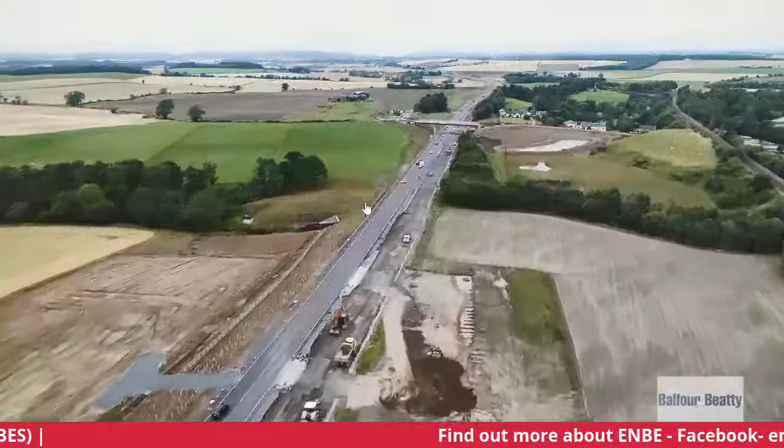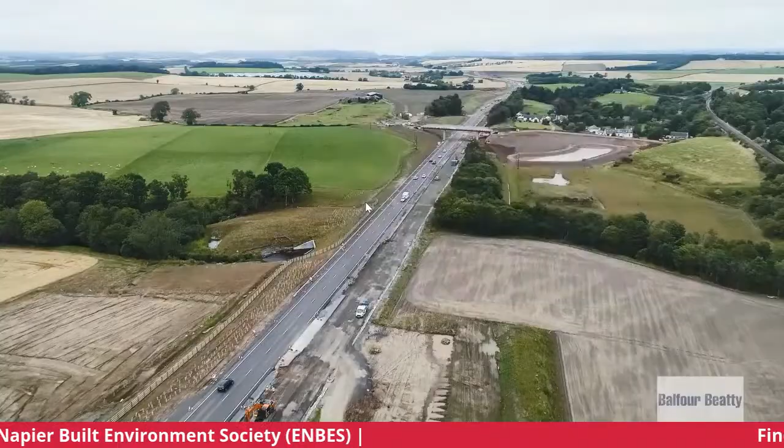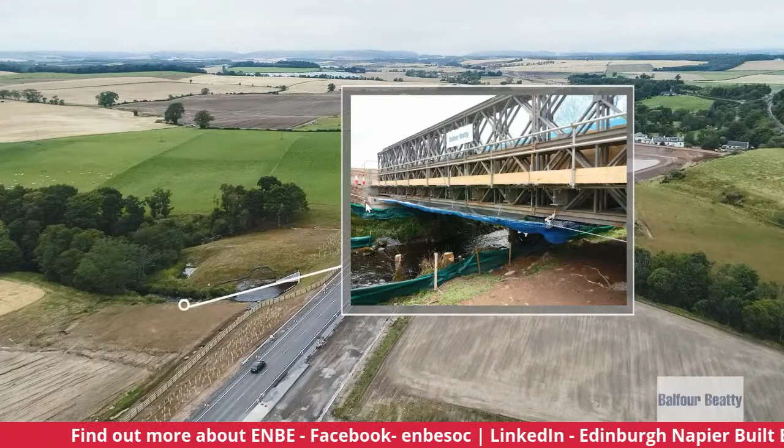So that culvert was formed with precast concrete panels and lifted in, occupying half the river at a time. This minimised the amount of live or wet concrete going into the river. To get past this river, we actually installed an army-type Bailey Bridge - we launched this in place. This then gave us access to earthworks and negated the need for transporting on the road; we could actually transport on our haul road. Now this is sped up, and if you blink you'll miss quite a lot here - this is the excavation works at the culvert, getting ready.

Then we bring in the crane. This lifts in the precast units, swap over to do the other side. And once they're in, we can then backfill over the culvert, and that then starts joining up the road there.

So we bring the material up to formation, done with the capping, remove any soft spots from the testing, come through with effectively the concrete road and then the surfacing.

Following that, you'll see coming through there the verge works, drainage topping up, topsoiling coming through there. You see the winter coming in, and then getting ready to put the traffic on it.

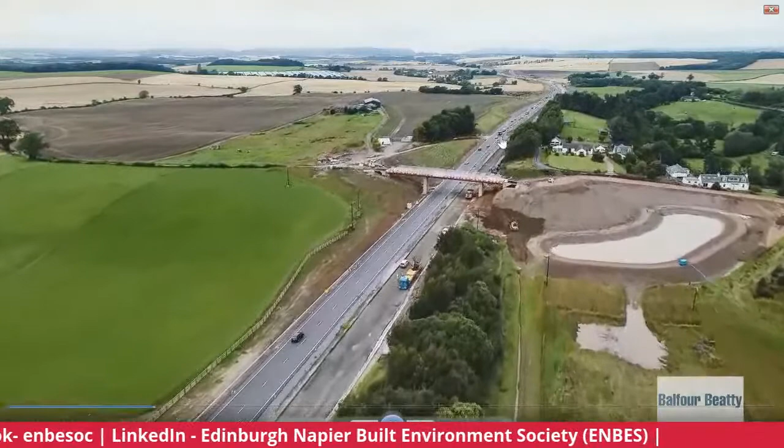But before we put the traffic on it, the adjacent bridge, which you'll see in a minute, took the beams in, and then so this bridge here is Pitlandie Bridge. It's called that. It's mainly for farm traffic and local traffic to get across, whereas previously they went down that track and nipped across. Large SUDS pond there, sustainable urban drainage system.

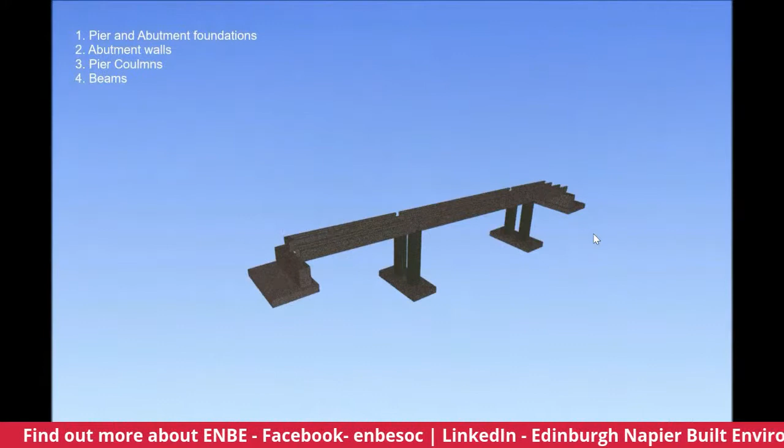So this bridge, because of many visits to the site we've had, we split this down into abutments, piers, precast beams, and then on the bridge deck, onto copes, backfill, extension wing walls, out to the parapets, and then you've got your impact barrier on the top.

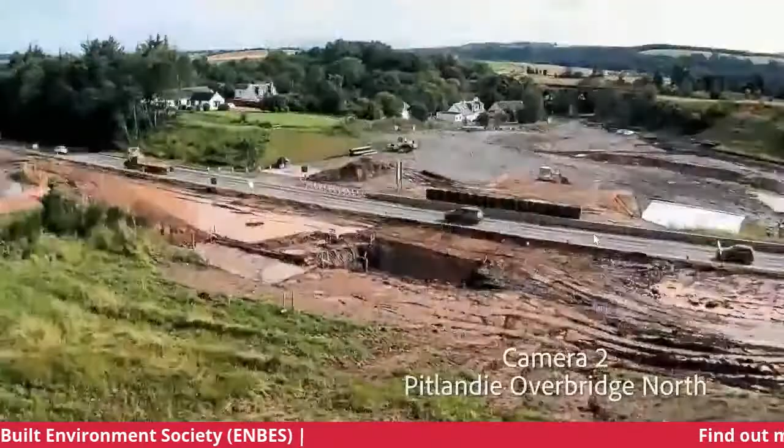So how does that actually look like in real life? You'll see the sheet piles on the other side. That's because the excavation for the pier is that close to the road. So piers on this side.

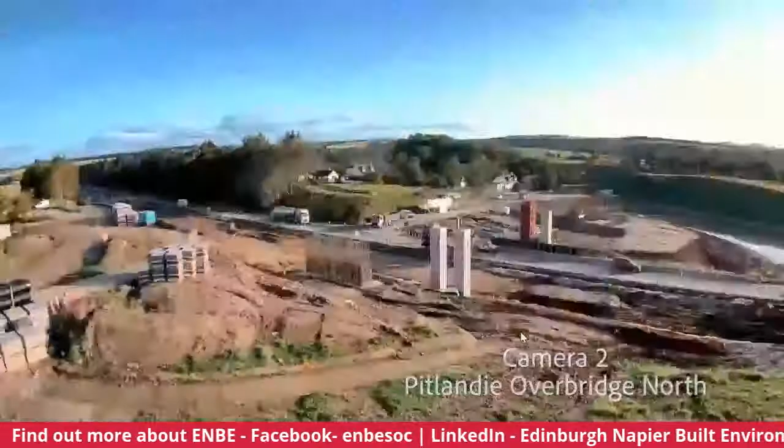Now we tried to ensure that we had as much replication as possible, so the formwork could be used again and again. So that, as you'll see, is the standard style of the piers and the abutments.

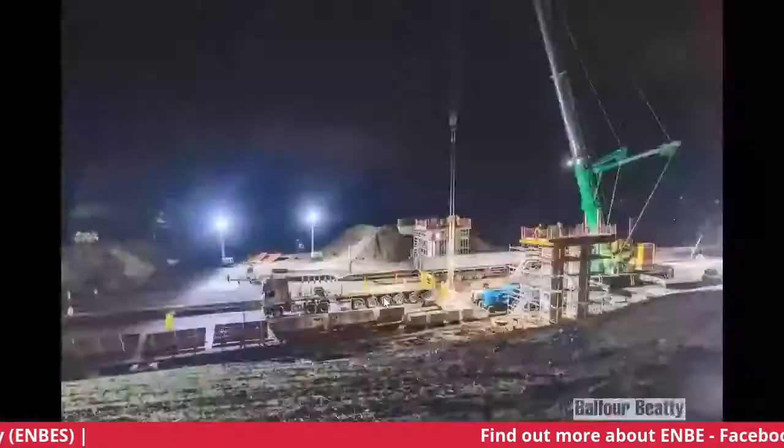And then when we're ready for taking in the beams, they land directly on top of the structure. There's no bearings as such, it's integral. There's a viewing platform across on the left-hand side there for people to come and see.

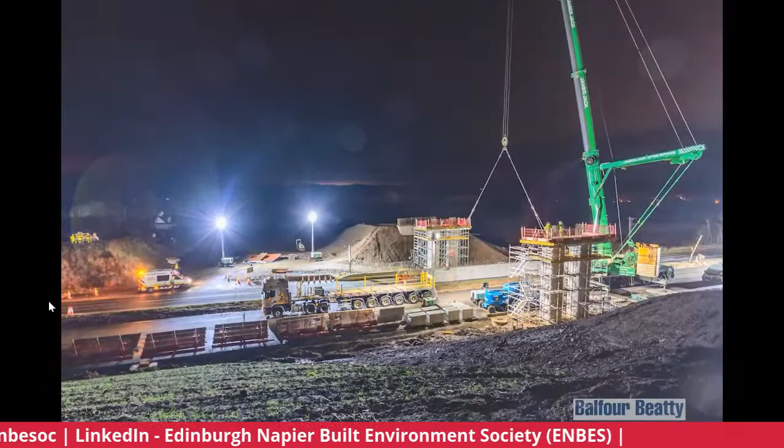Everybody's very interested when you bring in an 800-ton crane to lift these beams. You see them doing a couple of trial test loads there, getting the strops the right length so it comes down and then secured into place.

So this was a nighttime possession, closure of the A9. Diversions 30 miles either side. So a lot of advanced planning to do this. You can't just do this on an ad hoc basis, and once you're committed to that date, that's what you've got to go for.

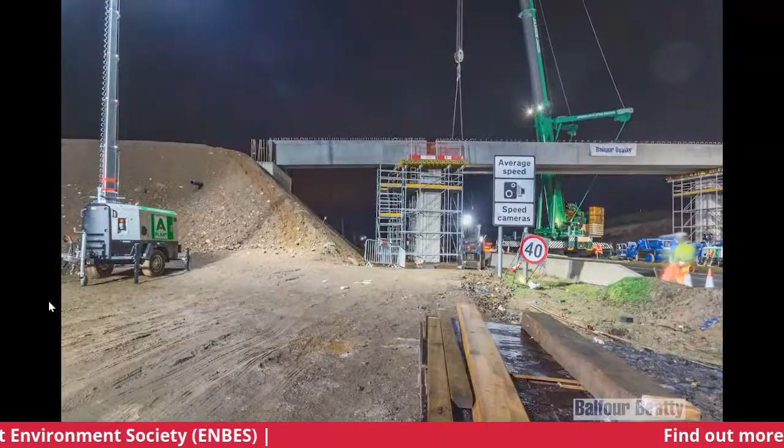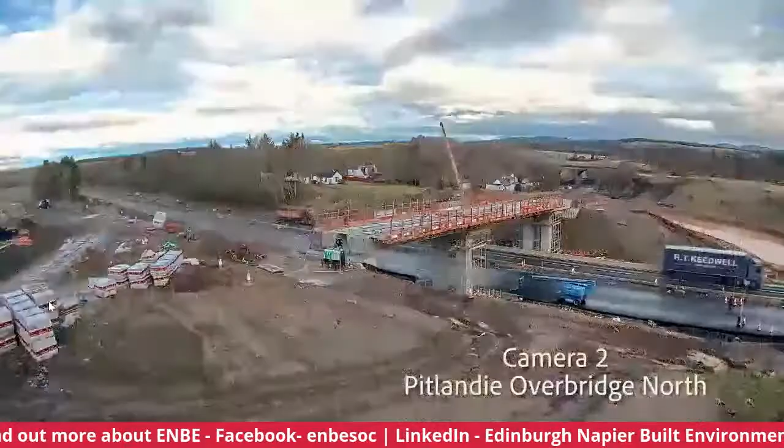So some beams are longer than the others. Once we got the precast beams on, we then lifted on the cantilever sections, trying to focus on the road possession and then drop back onto the bits that are not a road possession.

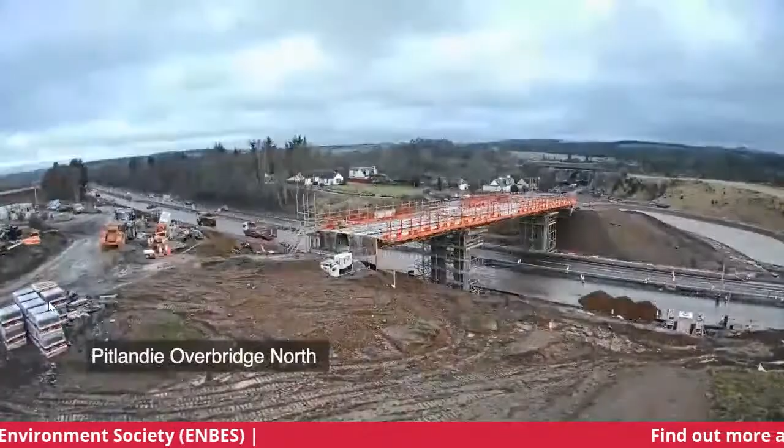So once they're in place, the plastic GRP panels, steel fix the deck, and then we can cast the deck. And then cast the diaphragms, which are at the abutments and over the piers.

As soon as it allows it, we can get the topsoil onto the verges, onto the embankments, and get the planting done. Thousands and thousands of new trees getting planted. Part of that is to negate the trees that had to come down for the corridor of the works.

See the junction there? That effectively will get done away with at the end of the day, and this road here would be the access. So it's minimising traffic coming onto the carriageway and increases the safety of the road, whether that's from tourism, tractors, or anybody else coming on.

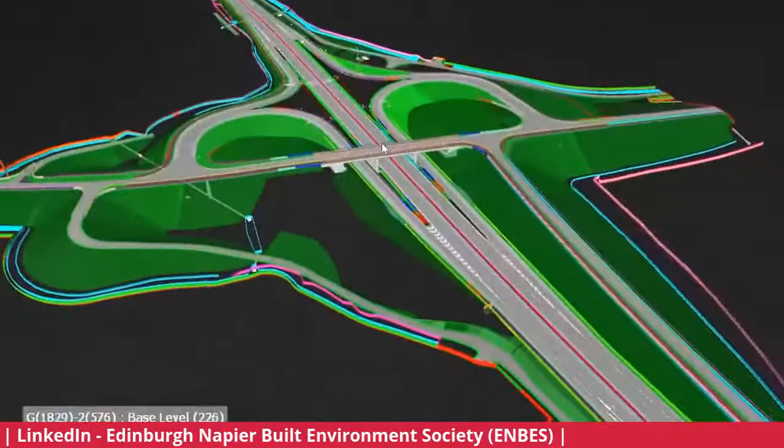Now in this area here, like I said, 500,000 cubic material was imported, and part of the works with Atkins was using 3D design and modelling. I'm not sure how many of you are working with a consultant are going to be familiar with this. Yeah, the colours are a bit wild, but they help highlight and detail different elements.

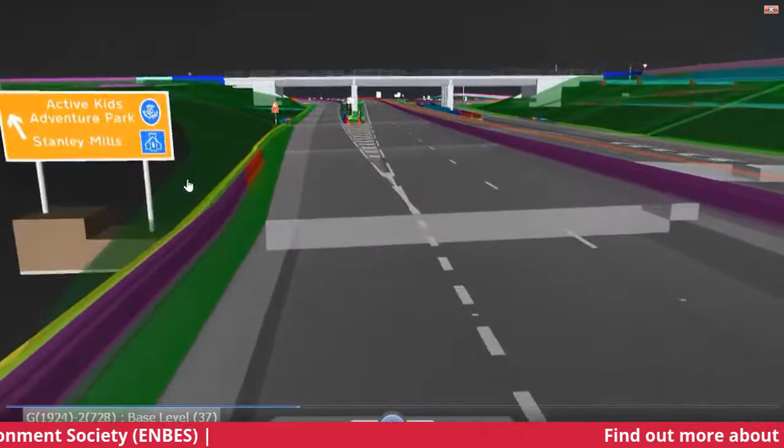Now this can be used with initial 3D modelling, then taken onto the 3D design. The whole point of this is though that we can highlight potential clashes, whether it's a base of a sign hitting a drainage, whether it's ducting going up, whether it's an existing culvert or lade which you require deep drainage.

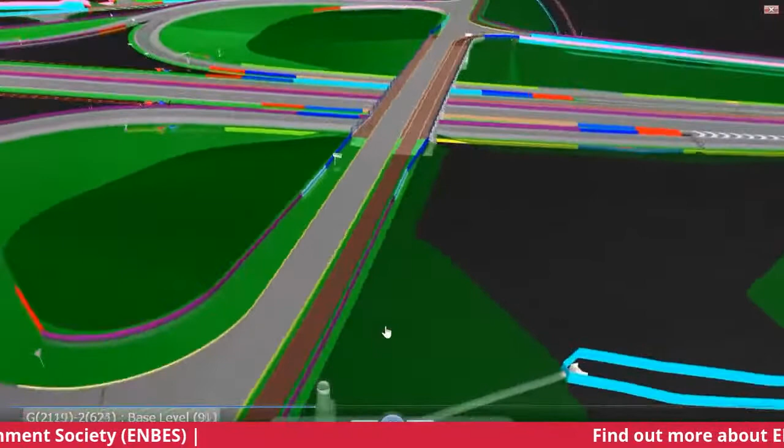So you'll see in the background here, this line here - that's a culvert we'd install before the earthworks. And then show where the cycle paths are going, visibility splays.

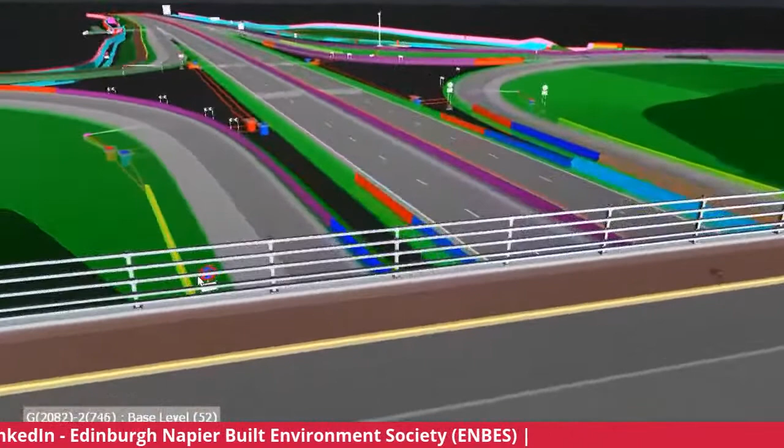So depending, this is obviously a fly through, but you can position yourself in any point of this model and see how things are coming together. Very powerful tool.

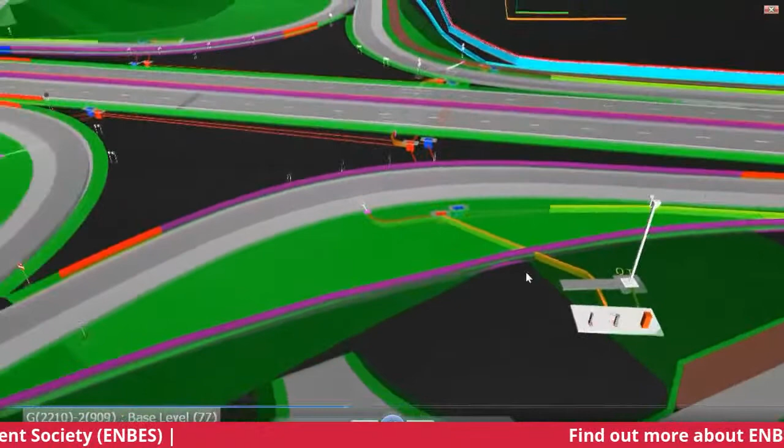It can help getting your signs in the right place. So coming up to a junction, for example, do signs block the view? I mean, that's not going to change your final stage audits from your road traffic, but you can see there the traffic counters inducting there, another one here. Many people don't know about the loop detectors and axle counters that are on roads.

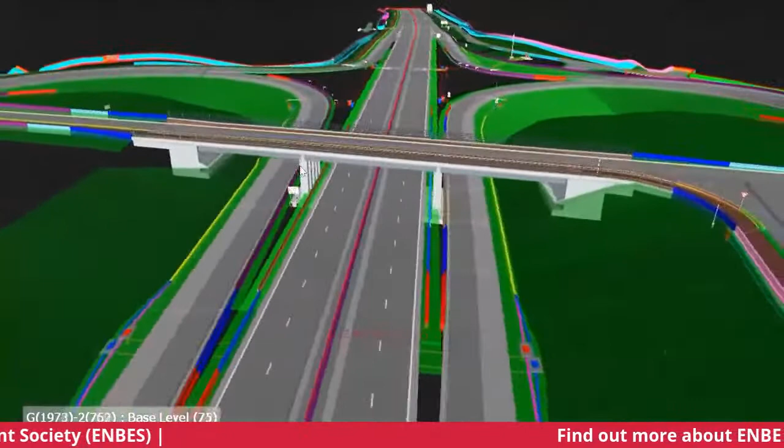Landscape area, where we can put the unsuitable material. A lot of the material we had here was marginal. We had to use a lime modification, basically rotavating lime into the soils, hydrating it and getting it to the optimum moisture content, which then allows the compaction of that material. Otherwise, that material would not be suitable to go in the embankments.

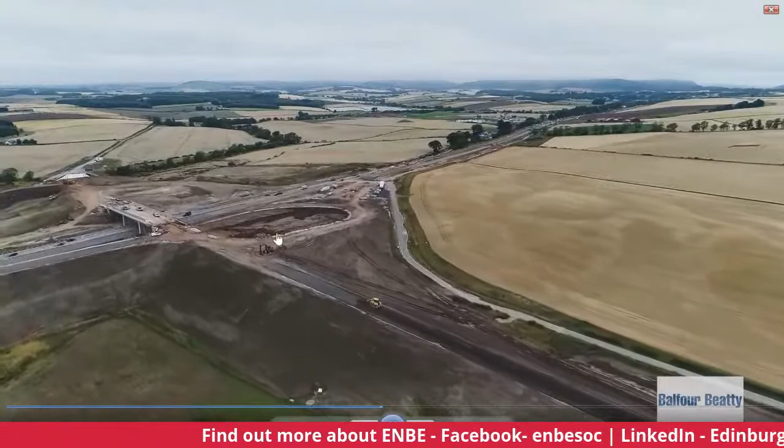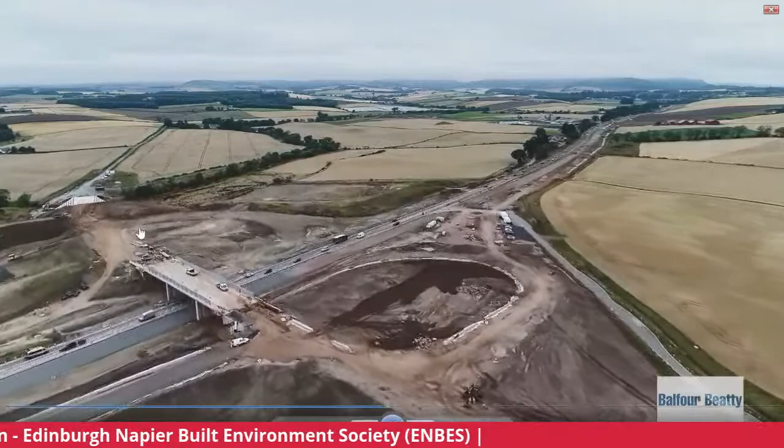So back to a live aerial shot from the drone. You can see the black there, that's actually planings, road planings that we're actually using as a lower sub-base type material. So that's minimizing materials going off site. You can see the suitable material there, and the white of the French drains, filter drain at the edge of the carriageway going round. Once we had this bridge in, this helped a great deal with getting access back and forward. This was a borrow pit to get some sand and gravels, and then there was this bridge here that we had an option to design.

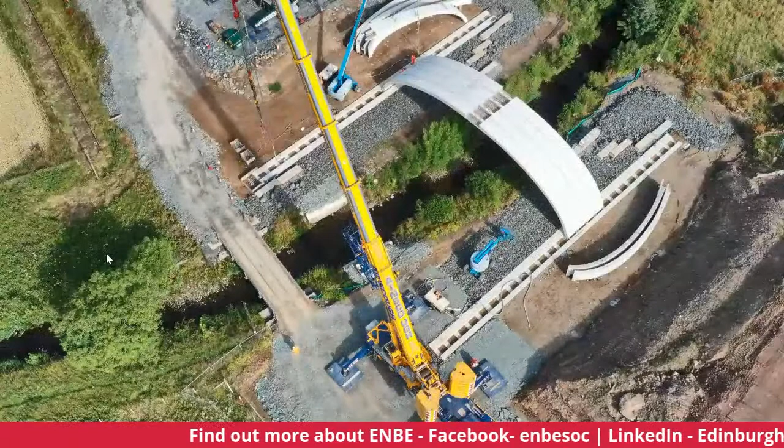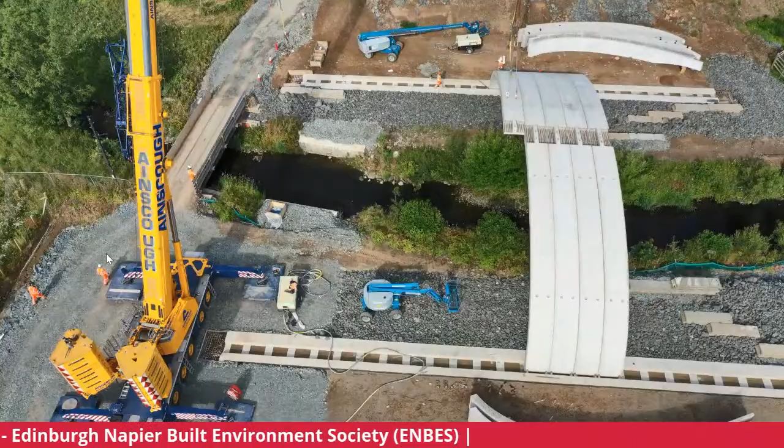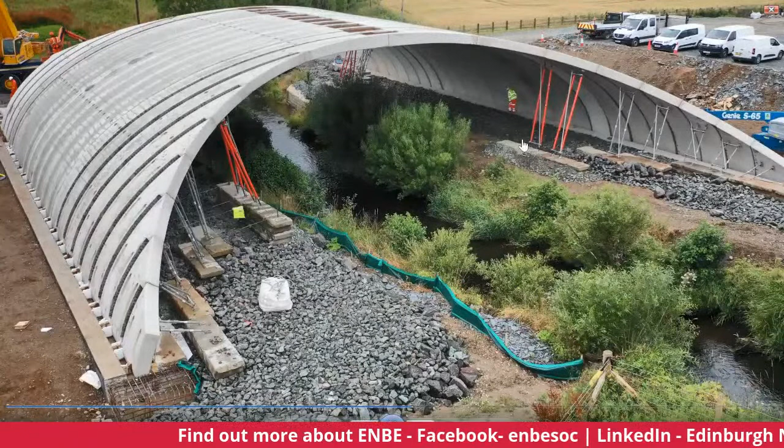So this went for a Bebo Arch. Apparently it's the widest span one in the UK, because this is a floodplain area. The sections came in on their side on lorries, and the crane either side lifted the arch, rotated that into a vertical position, and then they went together in pairs. Where they then didn't meet at the top of the crown, temporary works is required with blocks and props to hold it in place, and then the strips at the back were filled with reinforcement, joining up the existing bars, and then concreted in place so the whole arch was one.

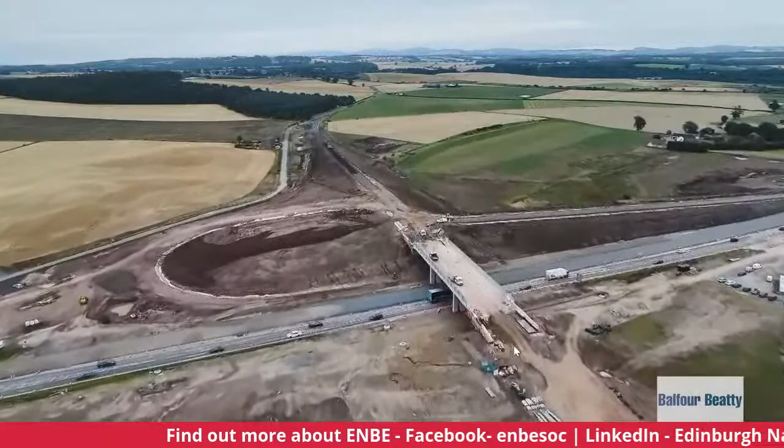We then swing round and start heading north again. Now, the reason I'm using this footage rather than the up-to-date one is you actually see more in it, rather than a finished road, which is in this location at the present moment, if any of you are driving up and down. But then on the right-hand side here is where we were into agricultural fields, and you can see as the hills appear, there's quite a volume of material to come out. So there's a new road for the part of dual carriageway there, and then this access road for farms running down the side like a parallel.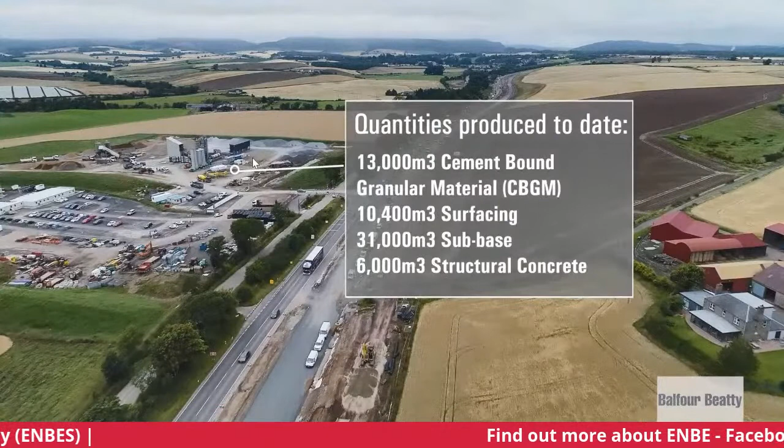Site compound here, and adjacent to it, Breedon's had a quarry. They produced the cement-bound material for the CBGM, surfacing and the concrete. So coating plant, you can see just sitting there, a concrete plant here, and a screening plant across out of the view on the left-hand side. Existing fields, so the new excavation came right up here, so cut-off drains, and you had batter drains where water would seep out. All that had to be controlled.

The existing junction going into Bankfoot is going to be remodeled, so temporary and then a permanent around the back. And this junction becomes longer, so the vehicles are travelling at a faster speed on the new carriageway, so the merges and diverges are increased. Now, this can be seen on the next part, which is a sort of animated video, which can be produced beforehand. And the whole point of this is that even local people can see what we're intending to build. So when we're finished, it should look a bit like this, with the longer junctions. And here we got the modelling, then the building in 3D, and it can be moved back and forward to help design and resolve issues.

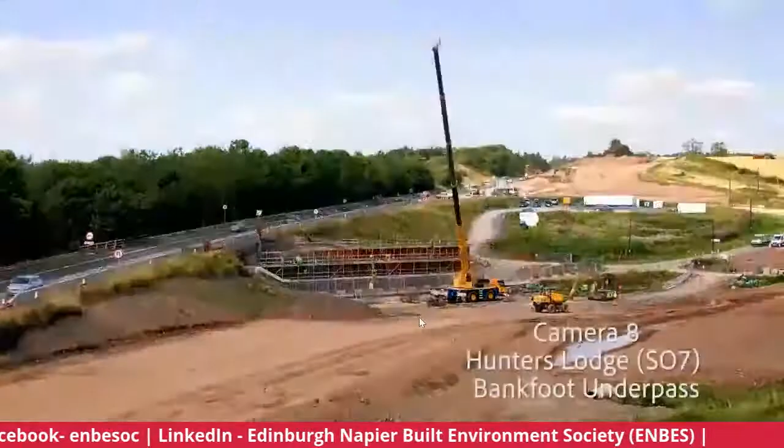Huge excavation here on the hillside, which then took us to Bankfoot. Now, the existing under bridge was just so long, but we had to extend it because on the skew it's over 50 metres with quite extensive wing walls, whilst keeping this road open. Now, some of you came up to do a hackathon to say, how are we going to build this? So for those, I think with Ben, yourself, and a few others, at this point you can see what actually ended up being the option. We actually ended up putting traffic lights on and then building both abutments simultaneously. I think one of the groups designed it alternately, and one group came up with simultaneously. So using a formwork, this formwork is called Peri.

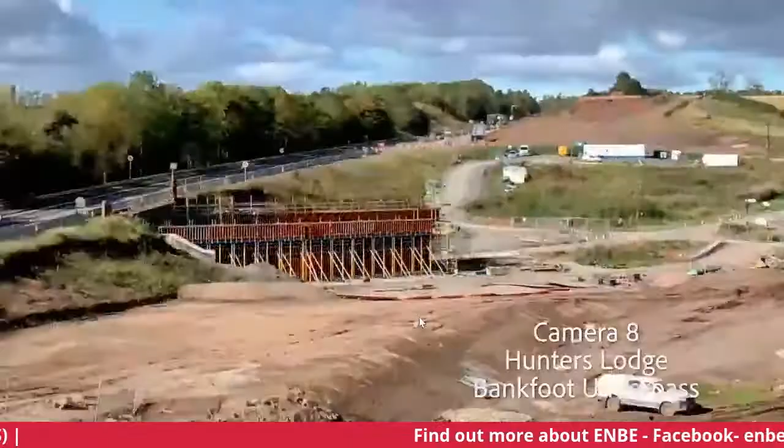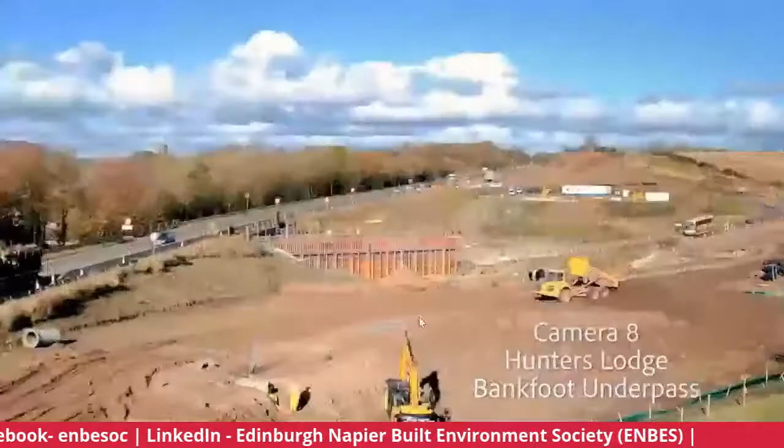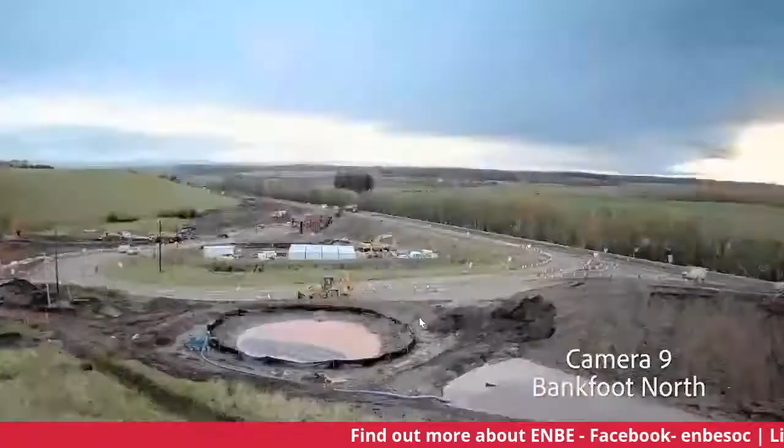The trio, modular panels, very quickly put together, standard from there. Meanwhile, the earthworks happening in the background offline. They're waiting for us to get the structures finished. But a lot of problems with water. So temporary SuDS ponds. We used added chemical flocculant from TATEC. This helped to clean the water before it was discharged.

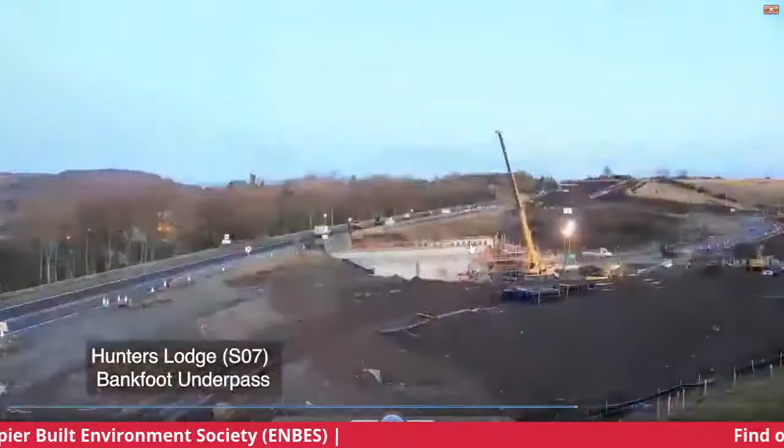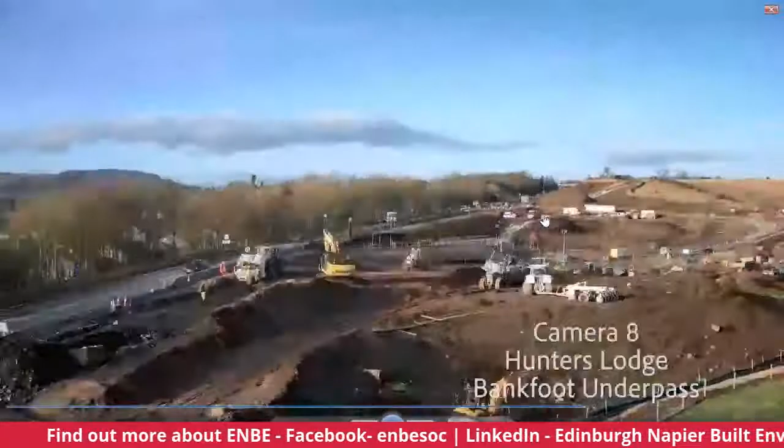So the two abutments were in place there, so get that blackjacked and backfilled before we could put the beams on the top there. In this area here, you see the white appearing in the background there. This is a lime tanker, so in between the snow, applying the lime, modifying the soils, and bringing them up to a structural embankment.

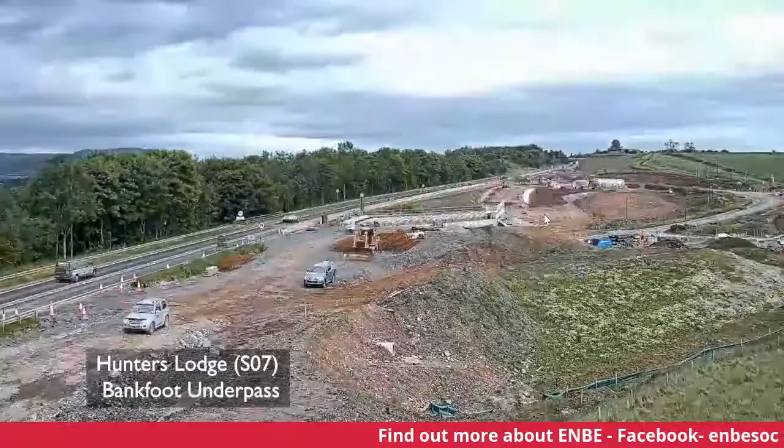And if you blink, you miss a lot of things at the speed of this. So that was COVID back in March. Fantastic weather, not permitted really to do anything. Then we got back and started. So then getting the fill in between the road here, because new road, and then the two slip roads. So the new slip road comes down and round, traffic going in or traffic coming up and going back out. So no cutting across the carriageway.

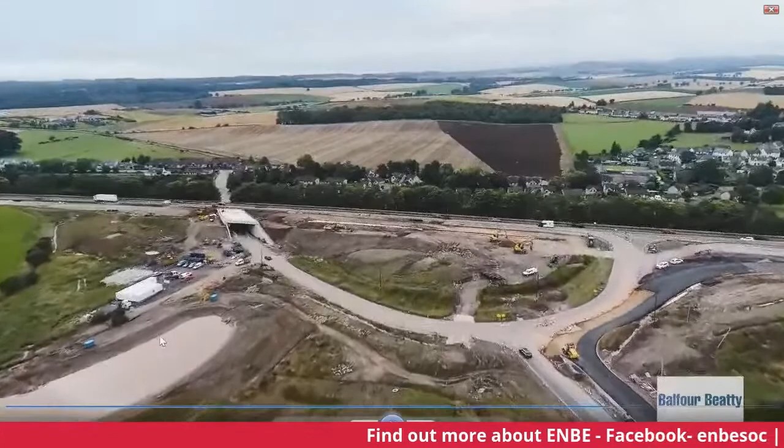Quite a large extensive SuDS pond there. Huge catchment areas when you're constructing roads, especially with the downhill. Now, you'll see the existing, I'm going to just stop this here. So the existing fields are here, the existing road there. So the slope has had to move all the way back and up to here. Now, if that was continued all the way through, the local farm there would be in thin air.

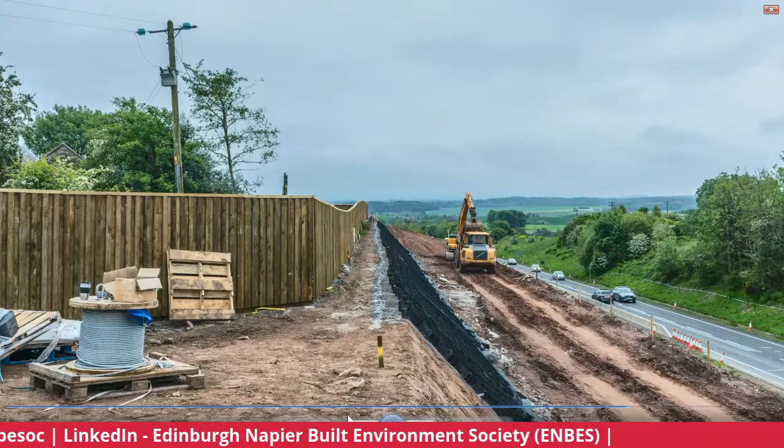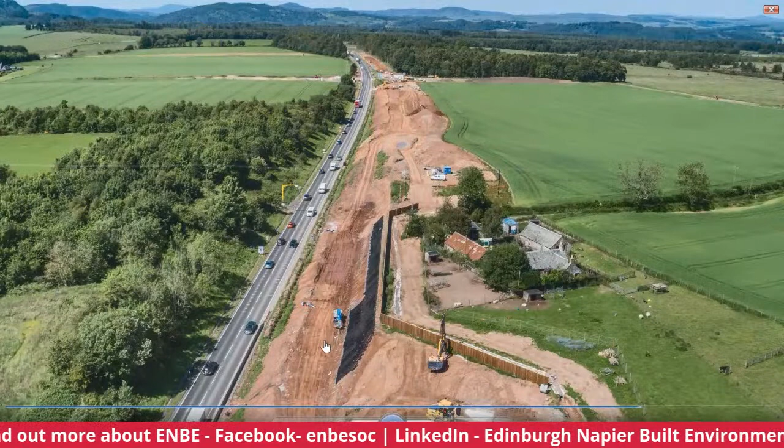So before we really started, this is putting out your fence lines, and then we erected a timber acoustic fence to cut down noise. Dig down a bench, and then the rock anchors, in effect, are soil nailing, drilled very quietly into the embankment. You can maybe just see one or two of the bars still sticking out. So this went down a level. You rolled that down, and then you basically bench this so you can have access for the rig, and then topsoiling over, and effectively that ends up being a grass slope.

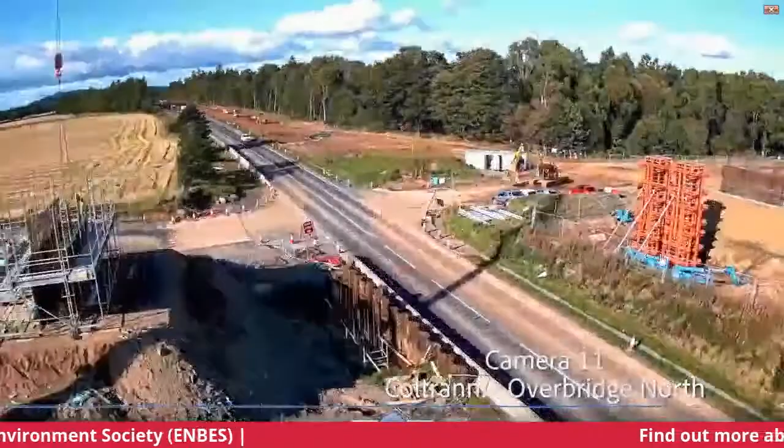Carry on heading northwards there. The new carriageway surfaced because the existing one's on the left-hand side. At the present moment, the traffic's on this side and ripping up and redoing this one. Another bridge here, mainly for farm traffic, Coltrannie. Very similar design to Pitlandie, the first one we saw. So the formwork that we've used, you can see very similar design. Only difference will be heights of columns.

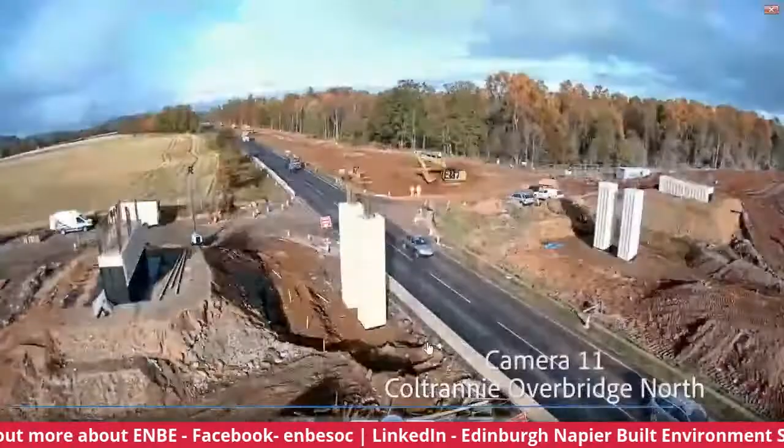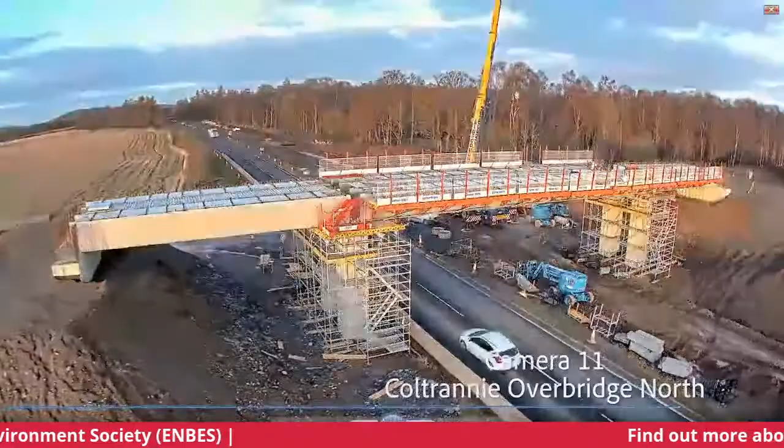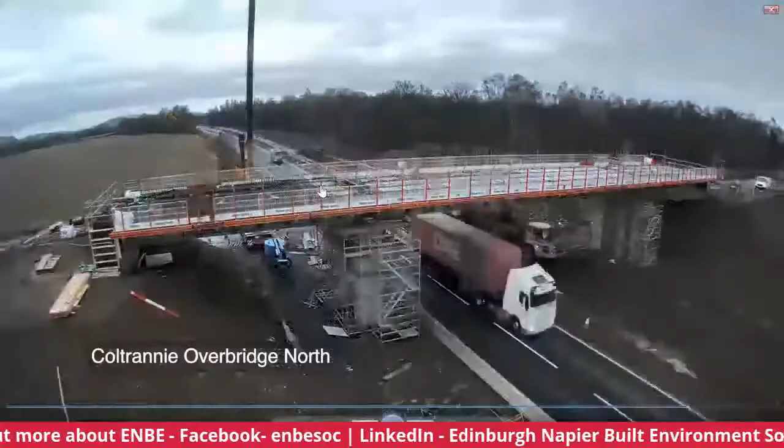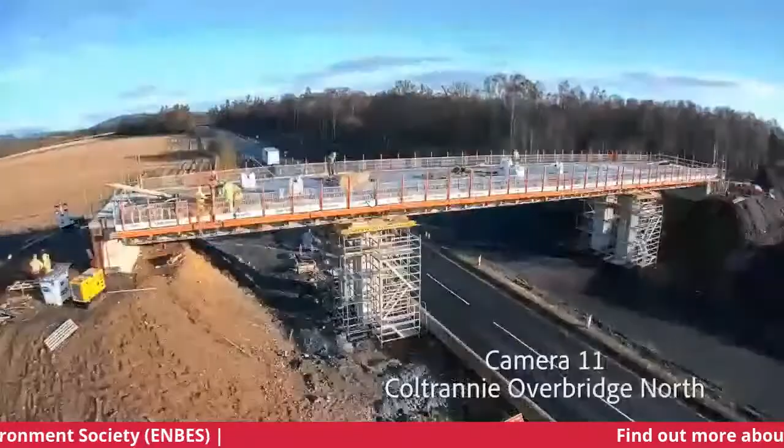Sheet piles on this side because there's cables up the side there, telecom, fiber optic. And then when it's ready to go, again, we had to shut the road, lift the beams in, and then you can see the cantilever formwork, parapets in. The white is the precast GRP panels, and then the reinforcement in. So you got diaphragm, deck, and then it's casting the decks. Once the deck's up to strength, then casting the diaphragms, which tie it all together. Once the deck's done, it's then casting the copes. Gives a lot of strength to the deck. We can then backfill and do the extension wing walls either side.

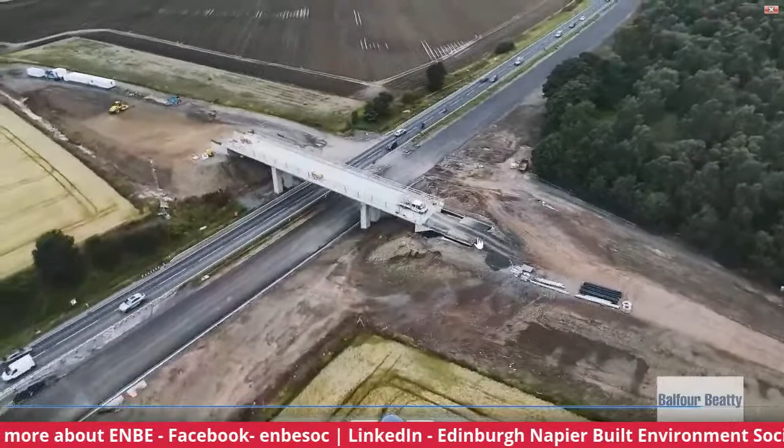Coming up. So the existing path for the farmer was on the side there, and now it's just going to be straight over and no access onto or off the A9. Heading further north in the last section, a lot of trees came out here. The trees were used at a sawmill, and what wasn't was chipped, and that went to a biomass station in Invergordon. Four laybys are going to be on, two at the south, two at the north here. BT mast was there, took a year to move it to there. For those who drive up, you'll see a fantastic dry stone wall that's been built along that section there.

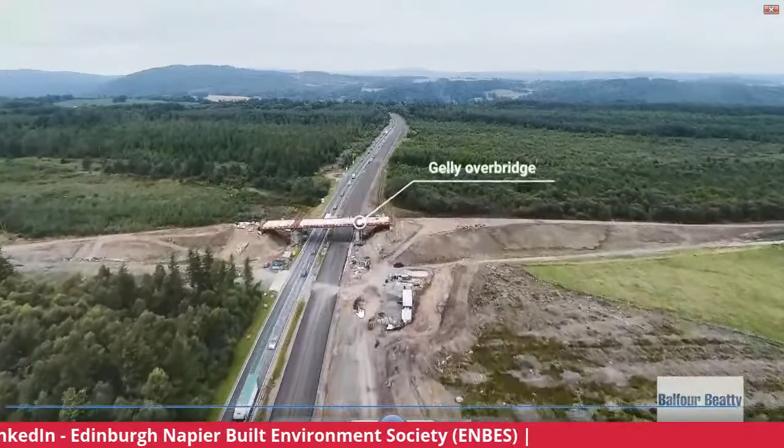At the top section here, another bridge, and this is for the estate, and one or two people that live along here at Gellywood. Now, before we were here, this was one of the highest points of the section of road here. A lot of peatland trees, not a lot to grow, as you can see in there.

So this was the existing junction before we started. Culverts existed. These had to be extended. Earthworks and construct the bridge there. We put in temporary turning points. This allowed us to, instead of going up and turning at the top and coming all the way back down, they could actually turn from there, cut down the amount of vehicle movements, and then eventually tying back into the existing bridge, the existing carriageway at the north end there.

So that's a dual carriageway that goes down to Birnam, and then there'll be a section to be dualed at Birnam, but that'll be a different contract. So that was a quick fly through of 15 minutes, which has taken about 18 months to put together there.

Let's see if I can come back to where we are on this. So do I say stop sharing or something? Let's have a look. Stop screen. Right, how's that? So I don't know, Ben, you're still on the call here? Yep, hello. Am I going? Yep, I've got you. Awesome. There's a bit of a delay there. Well, sorry, Ben, I'll let you go.

On you go, Stefan. Well, first of all, I'd like to say thank you very much, Ken, for your time there. Obviously the video there is very broad. I think you've put it very nice, very neat. As you said, 18 months. It's a lot for just a short video. But you can clearly see that there's many career types that we're using in this project. You can see surveying, structural, yourself as a project manager. There's many careers. Yeah, there's a whole range.

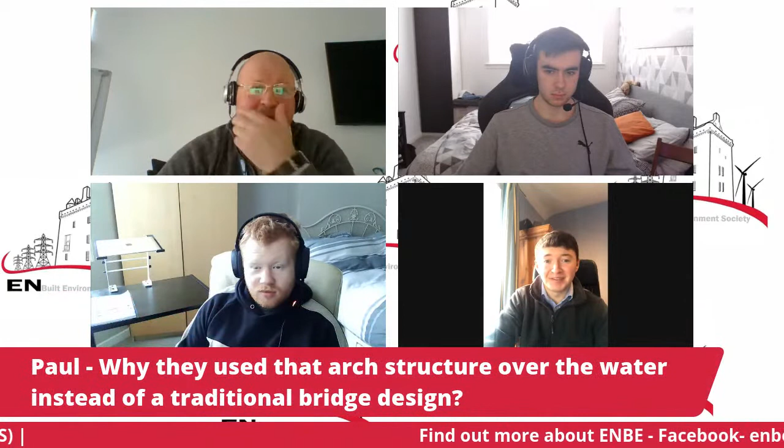That definitely does sound like an exciting job, that Funicular Railway. I'd be interested in that one anyway. Well, let me just give you a very short video. In for a treat here.

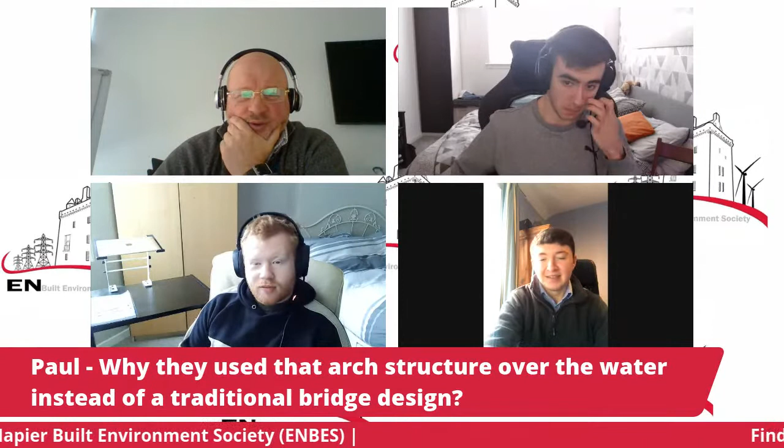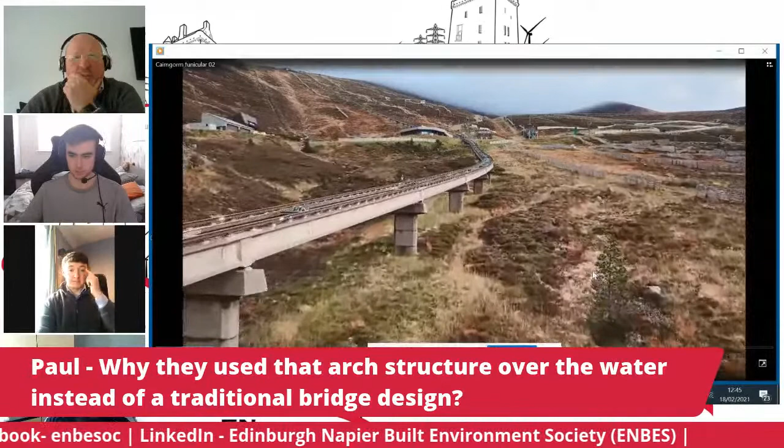Give us a shout when this comes on your screen. We got it there, yep. Yep, that's it.

Okay, the start of this is at 2,000 feet. It goes all the way up to the top, 3,600 feet above sea level. 94 piers, which support the structure, and there is a rotation of the piers at the present moment. So we've got to put in basically a prop, new concrete base, and then prop, and then change the bearings, and then there's some additional bolting and effectively stiffening.

That's the short version. Biggest challenge here, you're in a national park, existing environment's got to be maintained, and you can't just go about it in a normal way. So some of the piers are shorter, some of them are a lot longer, and very much different. So that's a sort of taster.

And let's come back to stop sharing. Yeah, so yep. That's maybe one for another day. All right. So Paul, if we get any more questions in there? There's one from me there. Yep.

Interesting question, that one. So okay, let's look at your standard structure. You've got your abutment base, your abutment itself, bridge deck, and then your bridge deck is either precast beams, because you don't want to be pouring live concrete on temporary works above a river where possible. So for one of the previous bridges, we'd have a similar design for that one there.

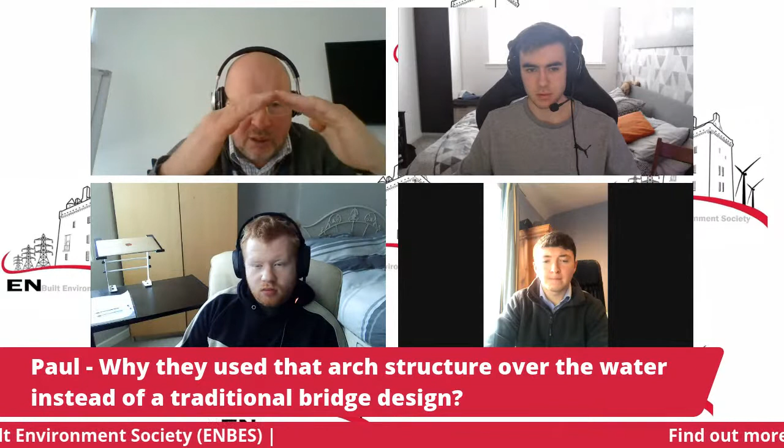And one of the questions that SEPA asked was, by changing it to an arch, would that affect the hydraulic flow of the river, especially with flooding? And the answer to that was no. It's not the first time at Balfour Beatty we've used an arch.

For those of you who've driven the M74 just south of Lockerbie and before Ecclefechan, I think the precast arch we put in there at the time was something like 250 to 300 meters long, which actually encompassed the West Coast main line. So not only was it 2 tracks, but also the electrification. Cost-wise, as somebody mentioned there, it can be cheaper because you're spending less time on site doing it, and it can be less concrete as well.

Basically, what you need to do is do a cost exercise between the two, including your transportation and your cranes.

I see. I think we've got one more question.

Okay, we have our own one that we use in-house. We have to record our sustainable facts, whether it's just in usage, water, diesel, from there. There's also the embodied carbon. So one thing about roads is it's very difficult to get away from the amount of carbon that's used when you're using concrete. So one of the things you can actually do is use a blended cement rather than a full OPC.

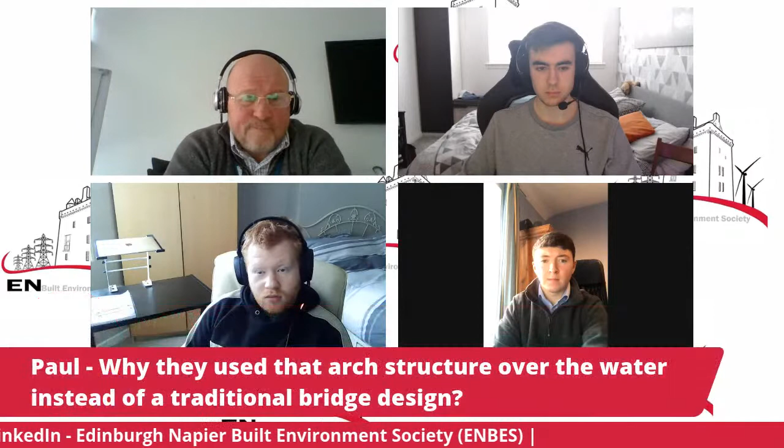Oh, I've lost the call. That's what's happened. Right. Sorry, we've a technical issue. I'm phoning Ken back. Got engaged now. Okay. So maybe he's trying to phone me back. So I've only got audio going one way, guys. You can hear me, but yep. What we were doing was doing this through my phone to Ben. I'll try phoning Ben again.

So we've got some students on there that are currently going through the project with the music arena, and okay, it's ringing, Ben. We've all got different roles. We've got project managers, structural engineers, geotechnical engineers, and of course Ken Brown's had vast experience within the industry, and he's obviously covered many of these roles and is currently a project manager at Balfour Beatty.